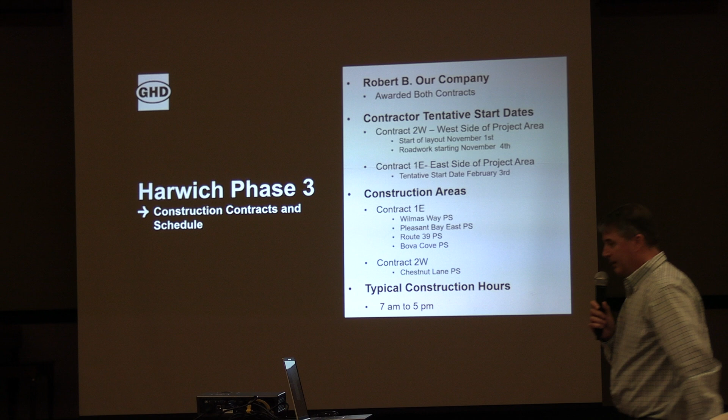So, as many of you are aware, Robert B. Our Company, RBO, has won both contracts, so there are 2 construction contracts that were put out to bid. RBO won both of them, so we are treating it as sort of a giant project, although there's nuances that we're dealing with management-wise. It's 2 contracts, but for your purposes, it's basically now one large project.

The tentative start dates as of right now, and we're still going through the schedule and working through that with the contractor. So they've submitted a tentative schedule, we're working through that. But they are looking to start some of the layout work, which is when they go out and actually mark up roads and get an idea of where they're going to be starting in various different areas. They're going to be starting to do that around November 1st, which is a Friday, and then they anticipate the road work starting the week of November 4th, which is the following week.

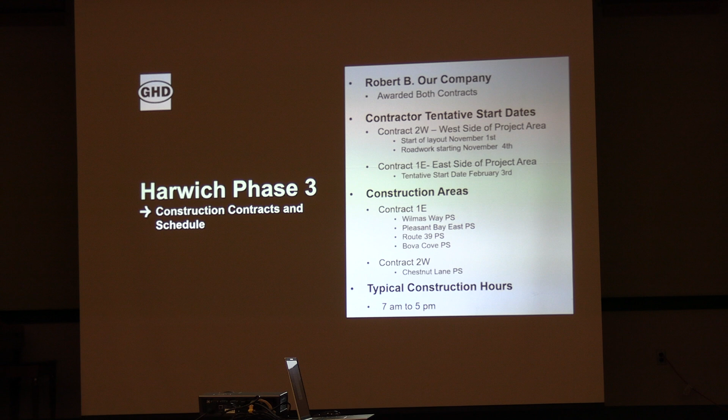They're going to be starting with what we call contract 2W, which is the western contract, which is essentially up in the Standish Woods area. So they're going to be starting their project up there, and then they have a tentative start date where they want to start contract 1E, which is the larger contract, somewhere around early February. That date is subject to change, and the idea is that they want to get started, kind of ease into it a bit as they're getting neighborhoods used to the construction, and then at some point both construction contracts would be going at the same time.

In terms of the construction areas, the 1E contract has 4 pumping stations in it. There's a pumping station that's going to be constructed on Wilmas Way. There's a pumping station being constructed on Pleasant Bay on the eastern side, so basically east of Route 39 and Orleans Road. There's a pumping station on Route 39, basically at the island, the intersection everyone knows as 39 turns to head north and Church Street over there. And then there's a pumping station located at the cul-de-sac on Bova Cove.

And then in contract 2W, there's one that's basically on Chestnut Lane. It's in the space between the cul-de-sac at the end of Chestnut Lane and Martha's cul-de-sac, so it's closer to Chestnut Lane.

In terms of the general construction, and I'm sure people have other questions, but in general, the contractor's going to be working from 7 a.m. to 5 p.m., Monday through Friday. They will typically be paving Friday afternoons, closing things up. They will be doing special things when it comes to weather conditions or holidays. They will typically not be working on holidays unless they ask for permission, in which case they will issue a formal request. The town will decide, depending on the type of work that's being done, whether they'll grant that. And then that would be part of the notifications that would go out, up on the webpage and through our avenues.

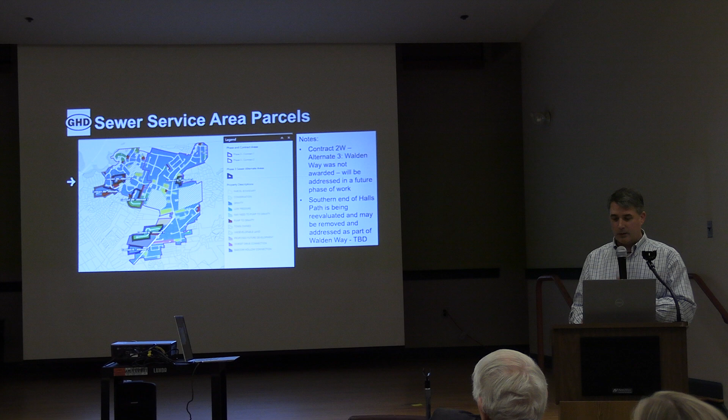So, the collection system. We understand that not many people are engineers or contractors who deal with this stuff normally, so in general, there are gravity sewers that we're going to be putting in. A lot of the Phase 2 that you're probably familiar with during construction, that's more of the long-standing traditional mode of collecting wastewater. There are pressure sewers, which is a smaller diameter pipe. It essentially acts like a force main, and people have grinder pumps that pump into the system.

So if you had a septic system that had to pump to your leaching field based on the layout of your property, it's the same kind of concept where you physically have to have the pump move the wastewater for you. Then there are pumping stations which are at low points in the system in order to collect all the wastewater so that it can then be sent to the gravity sewer that runs to the town of Chatham. So you have an interconnection with the town of Chatham, and you have wastewater that's treated over there. That's how it essentially works.

And then each property will have a sewer service lateral. That is basically from the sewer main to the property line, and that is part of what the contractor is installing. They install from basically the main road to the property line. And then property owners, when they go to make their connection, will be making the connection on the other end, basically from the house down to that location. And as part of the sewer collection system, there will be paving and site restoration done as part of the process.

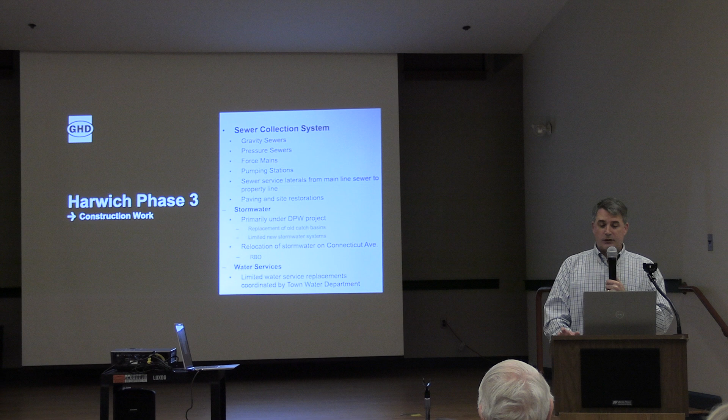There are small portions of stormwater work that the DPW is looking to have done as they fall behind the collection system going in. Right now, they're looking at replacement of old catch basins, and there are some modifications. I believe the only one that's actually part of this contract is on Connecticut, I believe. And then the town may be addressing some other drainage areas as part of their project, which is going to be following behind this project.

And then in addition, the water department is doing some limited water service replacements to change out old steel services to new poly water services. They're going to be doing that also behind the construction. So there's a limited number of those that will also be going. They're trying to get this utility work done before the contractor does final paving, so that they're not going back.

All right, so as I alluded to, there's a process that we go through during design to identify sewer service laterals. All we can do is work off the best information that's available to us. So what we try to do is look at what the restrictions are, where laterals can be. We don't want them near or on top of other utilities. We want to make sure that

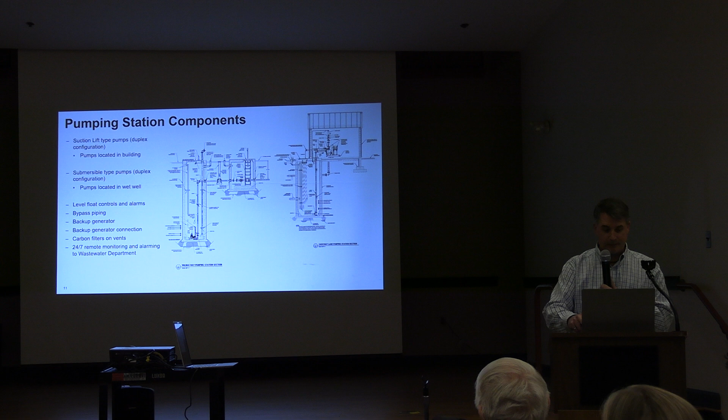On a submersible station, this is graded in. You'll have a valve vault, so that just has some valve equipment and I believe a flow meter. And then we have the pumps here, and the wastewater comes into the wet well, and then it's pumped out. Each one of the stations has a backup generator. The building will generally look like this. I can't remember which station that is, but that is one of the ones in Harwich right now.

Is that Church Street? Okay. So that's Church Street South, and is that a submersible or is that the... Okay, so this is a slightly smaller building. The one that actually has suction lift actually has their generator on the inside, but it's that general look: cedar shingles, white AZEK trim, asphalt shingle roof. It's intended to look more Cape Coddish than a brick building or a block or something to that effect. We understand. Unfortunately, it's a municipal facility and it's going to have other electrical boxes and configurations on it.

So this is generally what the stations will look like on the outside for the ones that we're proposing for this project. Sorry, I'm getting distracted.

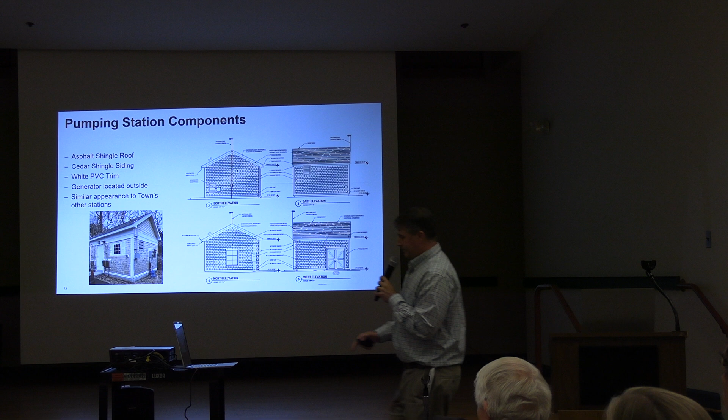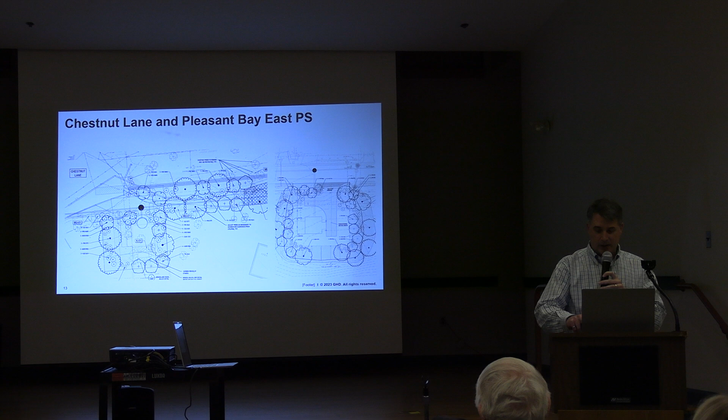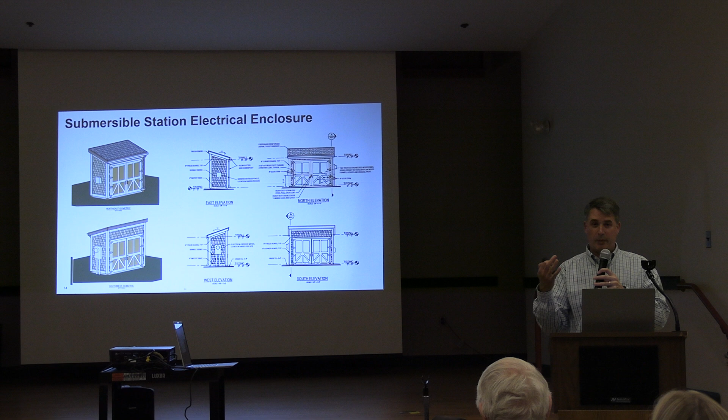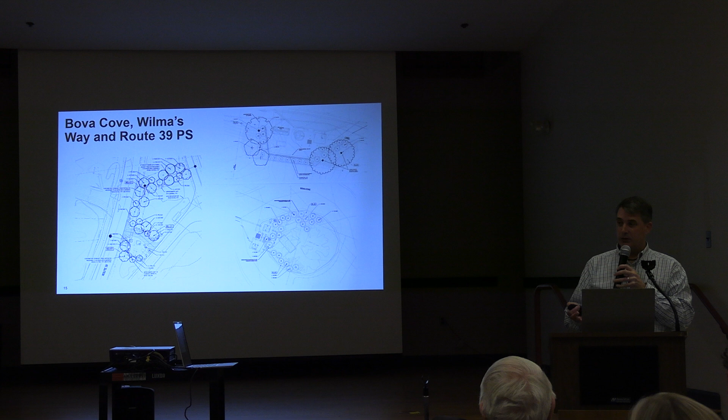And then again, the 3 stations, so you have, this is the Route 39 intersection, so Route 39 is here, Church Street is over here, this is the split, the station's down closer to the fire station. This is up on Wilmas Way. Town has an easement on private property for that, and then this is down at Bova Cove, it's at the cul-de-sac. So some of it's inside the edge of the cul-de-sac, and some of it actually sits in the pavement, the valve vault. I apologize, I know it's a little hard to see. And the presentation, I believe, Joe, is going to be posted on the town's website as well, so you'll be able to flip through the slides at your leisure afterwards.

Traffic control. So in general, and this is just intended to show you one example, sort of boiled down from the contract documents. You're going to have various construction zones, and then in those construction zones, primarily on main roads, we're going to have that traffic to detour around. So depending on which section of the road we're working on, people will be asked to drive around. There's no easy way to put it. It'll be like things you had to experience when they did phase 2.

Contractors are limited for the work they can do on the main roads, and when we're saying main roads, we're talking Pleasant Bay, Bay Road, Route 39, Kendrick, and Church. So on Route 39 and Pleasant Bay, there will be no major road construction in the summertime. Contractor may be out there to address an issue or things like that, but they can't be doing major road construction, laterals, force main, anything. And then on Bay, Kendrick, and Church, when they're at the point where they've got the main line in, in the summertime they are allowed to do lateral work with 1-lane alternating traffic on those streets.

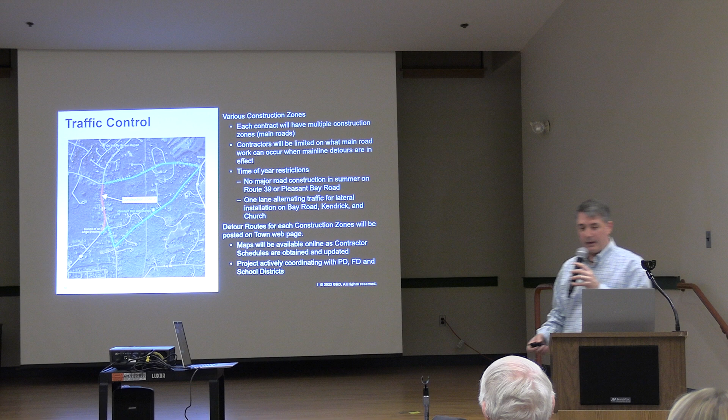Now, unfortunately, not all roads have nice little detours. So in cases, and this is just an example in the neighborhood of Standish Woods, for some of the little sprigs that come off that are essentially dead-end roads, the contractor's going to have to make sure that there's enough notification to the property owners that are on there, but there's going to be limited access during construction, only during actual construction hours. So the road is supposed to be opened up at night.

And then the police and fire department may actually station equipment at the ends of those roads to make sure that public safety is taken care of as they're working through that area. And that decision is made with the town and police and fire. And I believe that's consistent with what they did in phase 2 as well.

In places like Standish Woods, where you have the neighborhood circle, you may have to drive all the way around the other way, depending on where they're working. So if they're working over here and you live on Martha Eaton, you may have to drive all the way around and out. It's not the end of the world. Similar things on Chestnut and other neighborhoods like Harding Lane and other places.

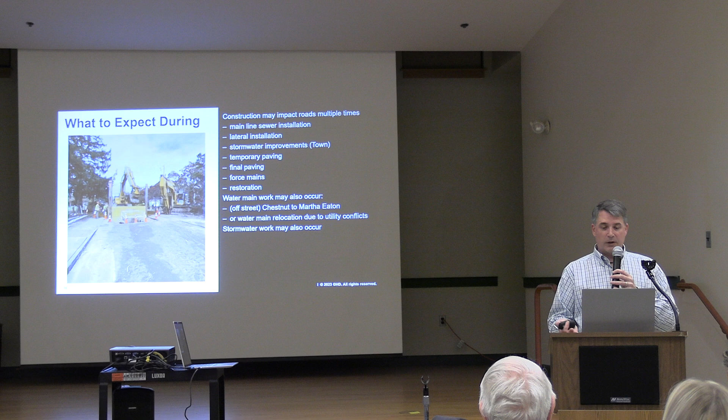So what to expect during construction? I think a lot of you probably experienced that from phase 2, but in general, there'll be mainline sewer installation work happening first. Then there'll be laterals and force mains. The town will be going through after the contractor has done what they need to do, we're going to coordinate how that's going to happen, but they'll make stormwater improvements as they need to go.

The water department will be making their service replacements, and the contractor will have temporary paving down, but you're likely to see construction on your road multiple times. So after they're done the first time and they temporary pave, they'll leave a patch. It's not going to be perfect, but it's intended to be drivable. But they will be back multiple times. So it's very likely that they will be into your road a large number of times, possibly even as many as one for each one of those steps.

And each one's going to have different levels of disturbance, but you should just be aware that it's not a one and done. Obviously, the contractor's going to try to be as efficient as they can be. And so this is sort of the worst case of spreading it all out. And then there is some water main work that's unrelated to the water services that has to do with the work over on Martha and Chestnut. But that's primarily going to be limited shutdown while we create isolation valves so we can keep those systems going and then make the interconnection between those 2 roads.

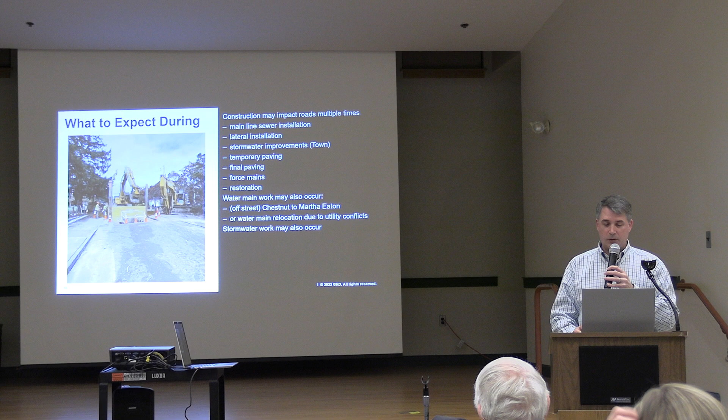Official project closeout is what to expect after construction. The contractor's going to come through and they're going to final pave all the roads. And then we go through the closeout process. So there's DEP approvals, clear water tests. There'll be connection notices that we send out, a welcome package, a list of local engineers and sanitarians that do design. There's a list of licensed utility installers. There's sewer billing and irrigation deduct meters.

You'll put in an application for your sewer service connection. That'll be through the water and sewer department. Your septic system will be abandoned as part of that connection. There are tax credits available through the state of Massachusetts with regards to new sewer service, similar to what they had for septic system repairs. I believe it's in the same category, but I'm not positive. I'm not an expert on that.

Cape Cod AquiFund has a county loan program, and I believe there was some other local assistance in there. Maybe you have more information on any of that. And then grinder pumps, the town is formally working on their policy, but I believe the intent, and correct me if I'm wrong, is for the town to be purchasing the pumps for the property owners.

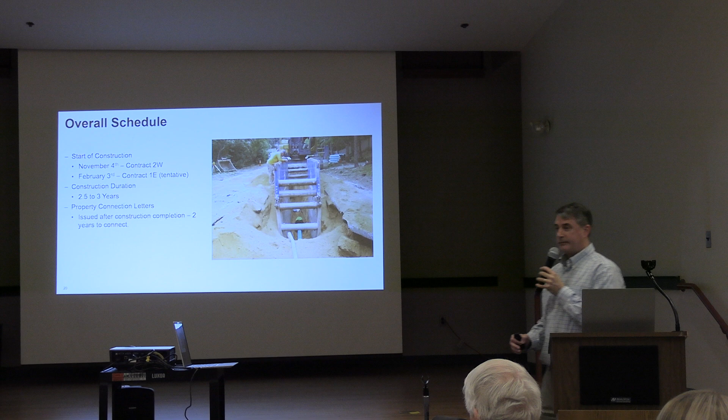I have a question. Perfect timing. I just have a question on the grinder pump. So let me walk over.

I have a question on the grinder pump situation. The town provides a grinder pump. Are they going to dig the hole and all that stuff and have it go in? That's an excellent question. What the town is going to be doing is providing the grinder pump, and then as part of getting your contractor to come make the connection, they will install the grinder pump. So the town is just providing the equipment.

So, I can speak really loud. Is everyone okay with that?

Do you have to have a generator if you have a grinder pump? You're not required to have a generator. I want to answer the question. The intent is that there will be what we call a pigtail, or a generator connection, so as you're having it installed, you could have the grinder pump wired, and if you have a generator, have it connected that way. It's the property owner's choice. It's not a bad idea to have a generator. But I can't speak to anything beyond.